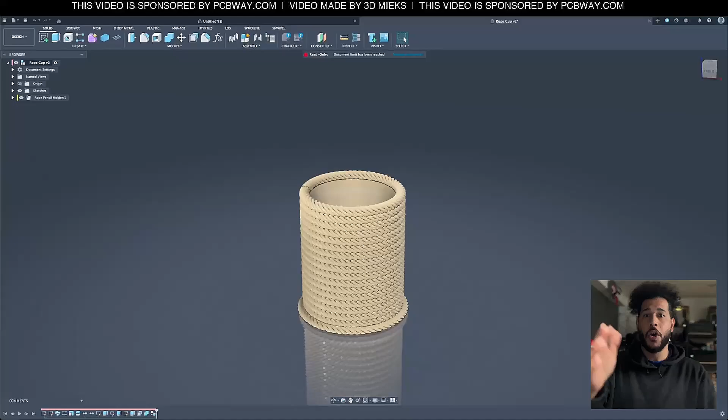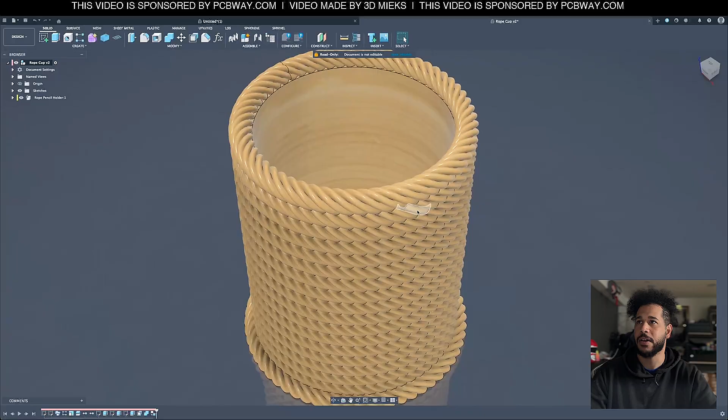It's actually pretty easy to do. A few steps might look super difficult, but this process is actually really easy. It might confuse you how to do it, but it's really simple—a few easy steps. In this tutorial, I will be making it parametric-ish, so make life easier at the end. But yeah, let's get started.

First things first, you're gonna need to start a new document. First thing I like to do is set some parameters. So let's add, first thing is gonna be the diameter. I'm gonna just go like that, and then that's the diameter of the cup. So I'm gonna go 100, and then millimeters, I'm in millimeters.

And then the other thing I like to do is the layers, so the amount of layers of the cup. So if you want it to be a certain amount of layers, we don't have to go in and change it every single time in this thing right here, whatever this thing is, linear or whatever. But this one does not need units. So we're gonna start with, let's say 20.

And then the other thing is we're gonna do a twist, so we're gonna need a little bit of I like to do revolutions and then twists. So first things first, we're gonna do revolutions, I call it revs. Also no units, and then we're gonna go 20 for now. And then this will control the amount of twist on the cup, on the rope, I mean.

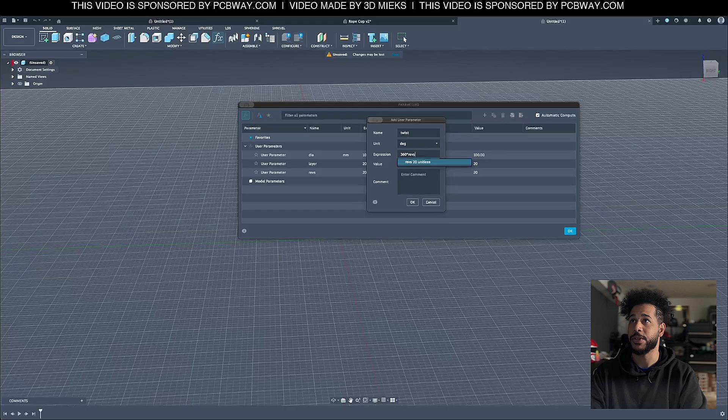So then the other thing is the degrees. We're gonna call this one the twist, and this one is 360 degrees. This is important because the twist, since it's a full circle, needs to be 360 degrees times the amount of revolutions, which we got 20 for now. So instead of going in and changing them every single time, that's what I like to do. And that's it for now.

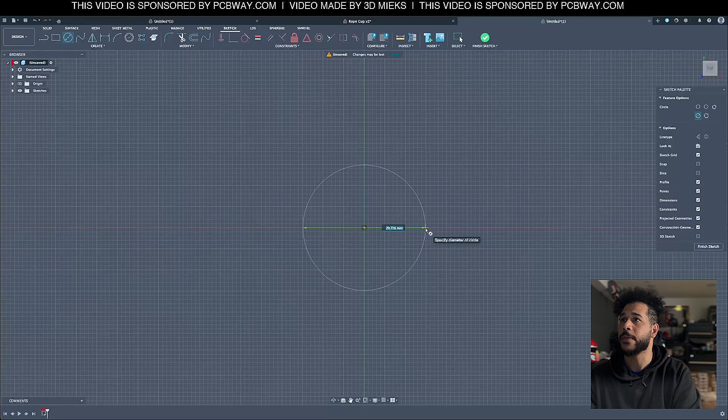Okay, first we wanna start a sketch on the ground plane. And we're gonna make a circle, starting it from the middle, and we're gonna dimension it to the diameter. So there we go, and that's all we're gonna do.

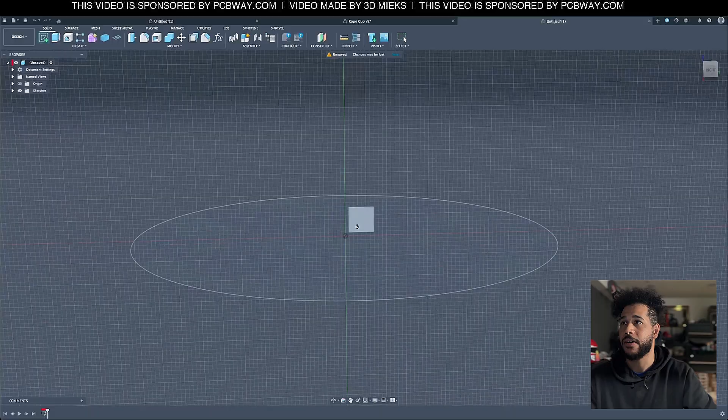Now we got our profile, and now we need to make the rope itself. So what we want to do is start another sketch on the upward plane. We want it to start right here and go around, but the pattern we're gonna do is project, intersect, and then we want to go right here, and make sure the projection link is on, and hit OK.

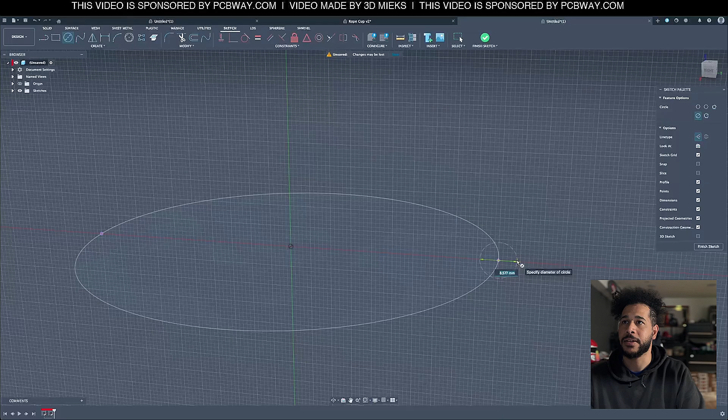So now this is the rope we're gonna do. Now what I like to do is make a circle, but then we're gonna hit X to make it construction. This will be the general thickness of the whole rope. So we keep it in. I like to do like 8. All right, so now we're gonna do 8.

And then we're gonna do another circle, and this time we have to disable the construction. And then we're gonna do a 2-point, because this one will start, drag that up from here, all the way down to here. And that's what I like to do.

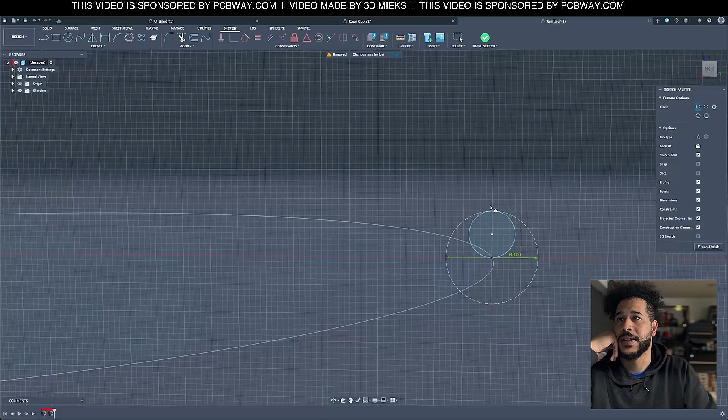After that, we're gonna go into make a circular pattern. We're gonna circular pattern this circle along this. So we got 3, but I like to use 5. Gives it the coarse enough look. If you want the rope to be smoother, you could do more. If you want it to be rougher, you could do less. But I like to go with 5, and hit OK.

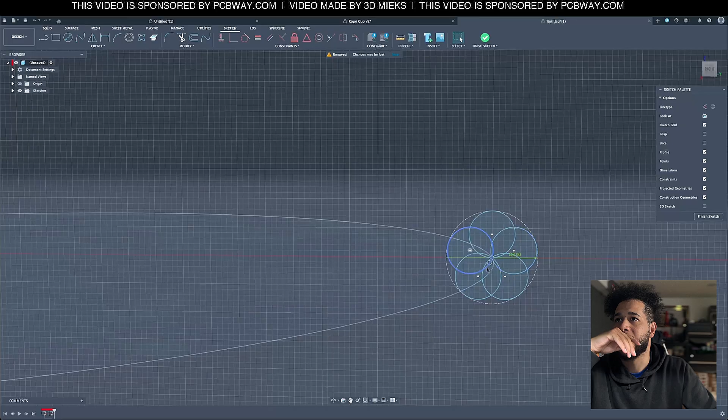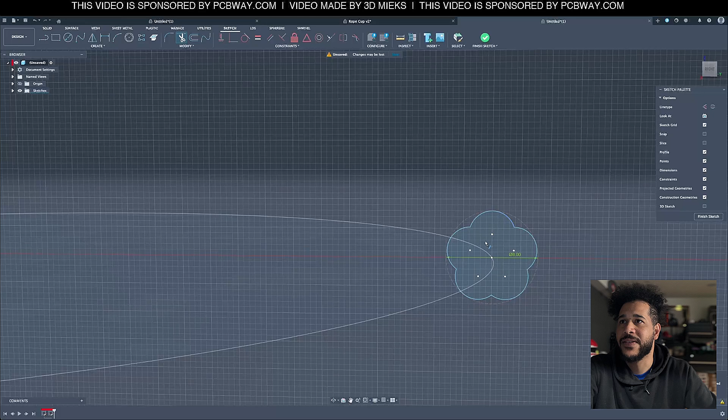And now we got this kind of shape, right? So what we want to do now is I like to trim it, so you could keep it the way it is, but then it's more profiles for the computer to calculate, so we're just gonna trim it. We hit trim, hit here, get rid of all the inside parts right here. And now we have kind of this clover looking thing. And then from here, we just finish sketch.

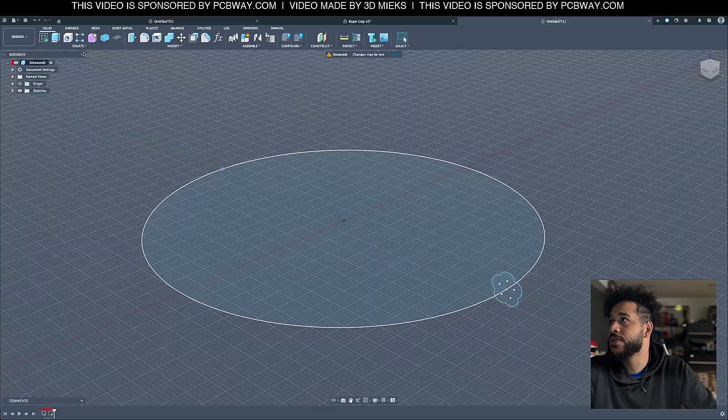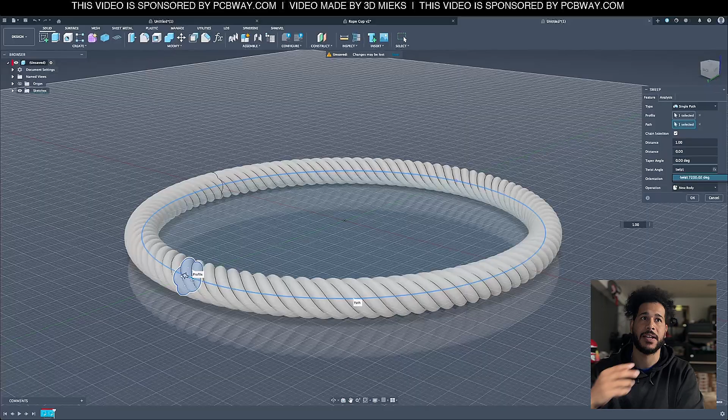And this is where the fun begins. So what you want to do is go into create and then hit sweep. We're going to sweep this profile along this path. When we first start here, it is just a basic thing, but now we're going to go to twist angle, and change this to twist. We already have it set up for 7200 degrees, so you see it previews and makes a rope. So there we have it—we have a rope looking body.

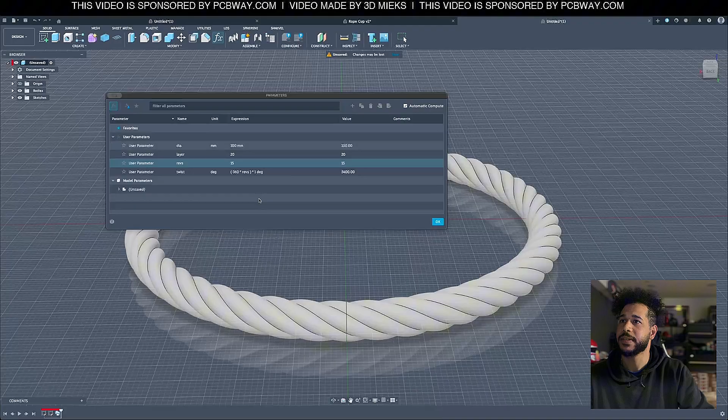So this is why I use parametric settings. We could go open it back up, and then we could change the revolution to say 10, and it'll change the pattern of the rope. But let's go 15, give it a little bit more twist, and then hit OK. Now we got a single ring.

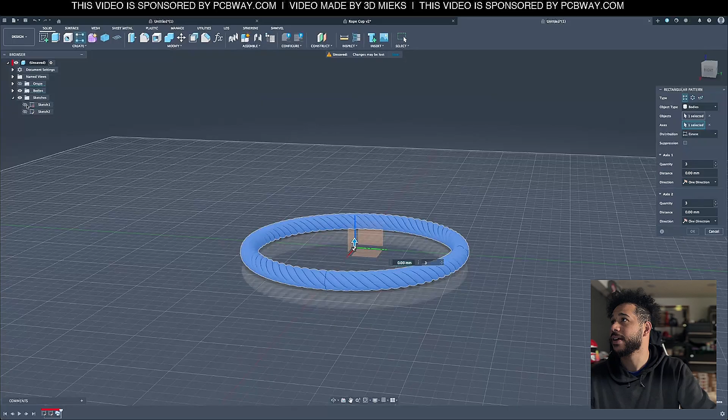Now the next thing we want to do is create this pattern vertically to make like a cup shape. So first we're gonna do rectangular pattern. So we select the body, and then we want obviously the Z-axis, and we made that circle in our sketch right here, 8 millimeters, right?

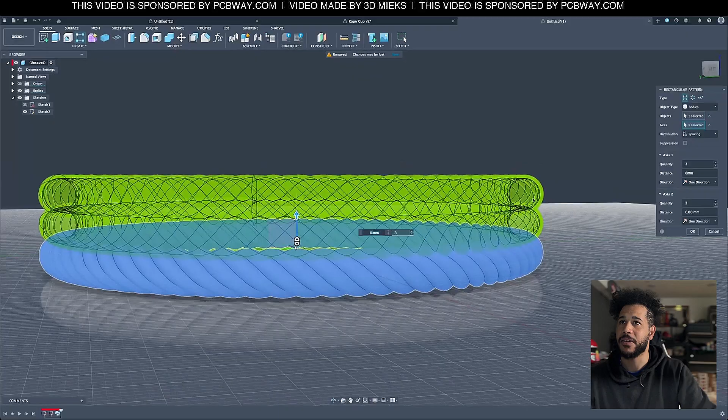So what we're going to do is we want to change the distribution to spacing, and then we want to change it to 8. But if you do 8, it's going to be sitting too much on each other, so I like to drop it down a couple millimeters, so then it makes this nice little overlap, and you'll be able to 3D print it no problem.

And then for quantity, we're going to change this to layers. And then as you see here, we got 20 layers creating this cup looking style.

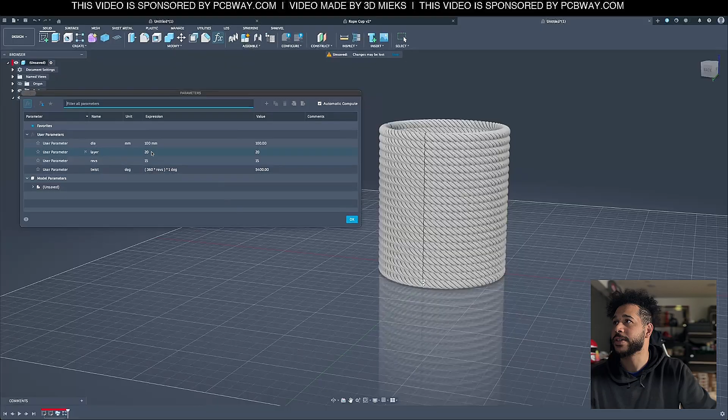And then again, if you want to go and change, if you want it only half, for example, we go 10, and it makes it a little smaller into like a smaller holder. Anyways, so you make this to the height you want. So we're going to change this back to 20 because I like that, because 20 times 6 is 120 millimeters, and that's the average height of a cup I like to do.

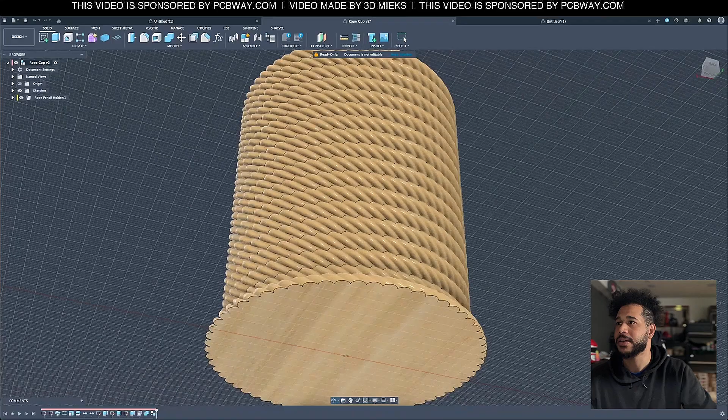All right, we have this. So all we need to do now is make a base for it, and I like to, like the other one, I had the base closed like that, but then the rope texture right here is slightly bigger. So what we're gonna do is...

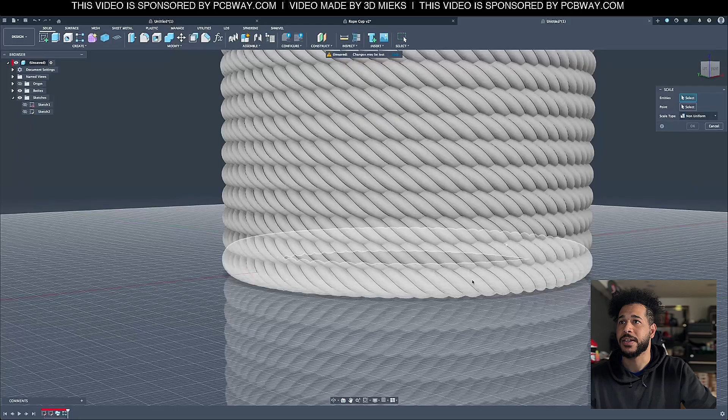Scale. I'll just nice and easy scale this bottom one. So if you hit the letter S and then search scale and hit enter, you select this body, and then we're gonna make sure it's uniform, and the point will be, you have to turn on your origin, and the point is right here, and then make it like 1.05. It's like trial and error, so maybe we could go 1.1 because we don't want it too big. Yeah, that's too big, so we'll go 1.07.

And I kind of like it there. No, a little bit smaller. 1.06 - that gives it a little bit of a higher base, and we'll call that good.

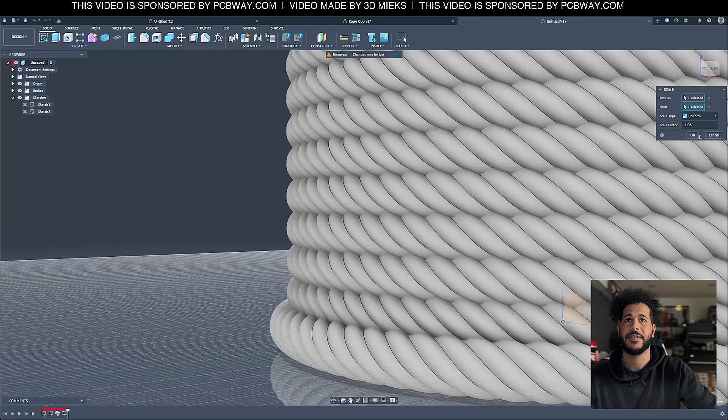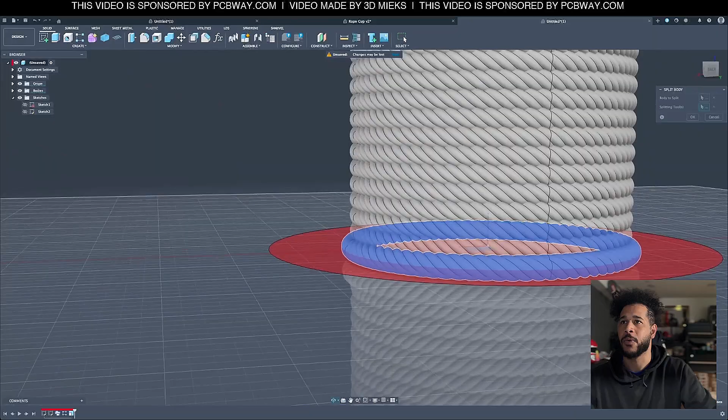So now we have another issue, we need to close it up on the bottom, and we can't let it sit on there. So first thing we're gonna do is we're gonna do split body, just like the base size thingy, the base rope, and then the splitting tool will be the ground plane, and then hit OK.

Now it splits that, and then we can just remove this. So Shift R, we select the bottom part and remove it. Now we have a nice little base.

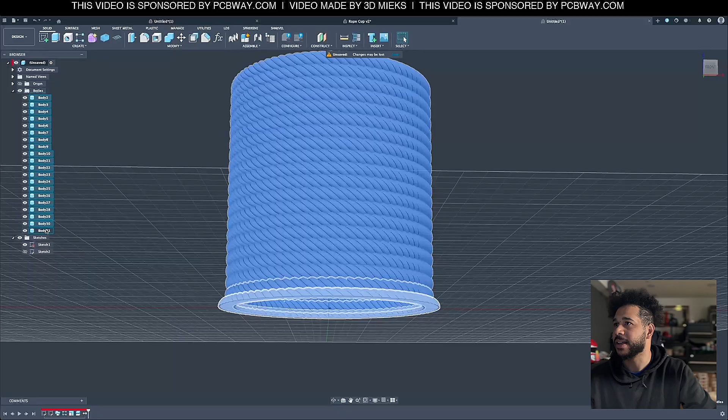What we're gonna do is we're gonna just turn off all these bodies by selecting them all and hitting V, turns it off. And then we'll go here, hit E for extrude, and then we're gonna make this 4 millimeters.

All right, and now we're gonna take all these bodies and then open them up again. And then you can see from the inside, everything is all closed off.

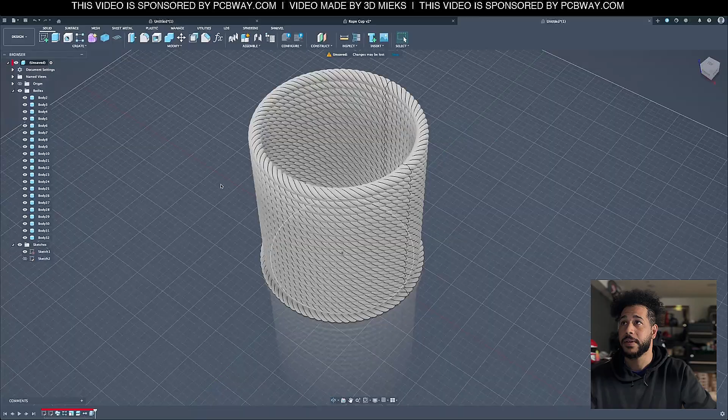Last thing we have to do now is to combine them. So it's very simple, we'll turn off the sketch, close it up, clean everything up, and we'll just go select all like this and then go into combine. This might take a second.

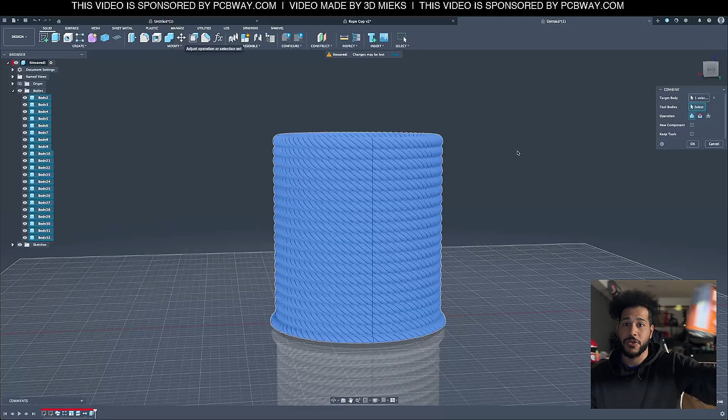All right, and now this might take a minute. So this is where you go and have a sip and enjoy, take a break.

All right, we are done. We got this all in one piece, and this is ready to 3D print. Just like that, we got ourselves a rope-like cup. It's all one piece. You can 3D print it without supports.

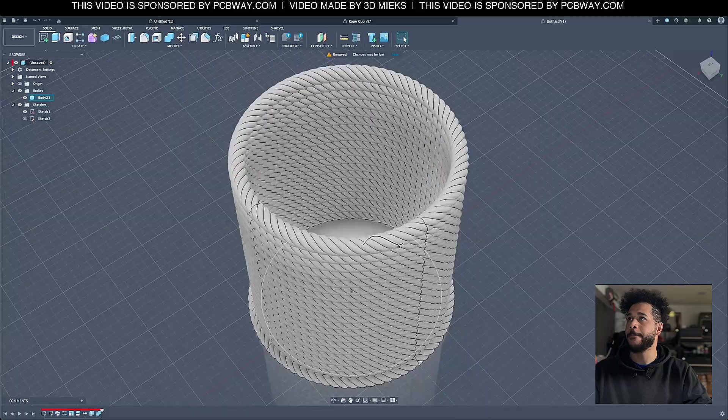Last thing we could do is change the visibility to shaded so it looks nicer, and then turn this grid off. Now we got a nice little look to it.

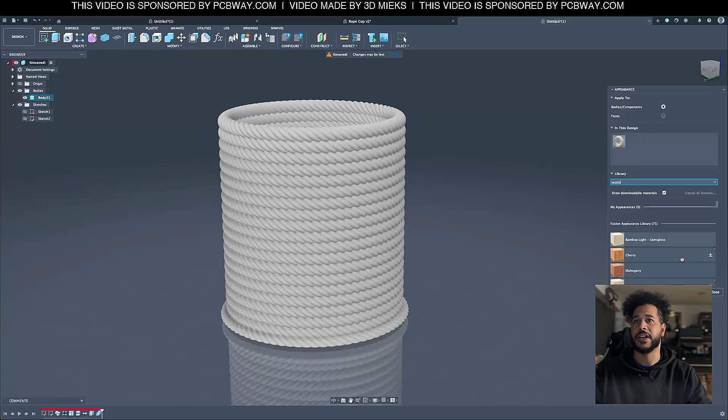What we can do is add some texture to it. I'm gonna just quickly do wood material. I will just go mahogany, for example, and drag that on there. Now we got our rope-like looking cup.

Pretty simple, you could use the rope methods on different ways. Doesn't necessarily need to be a circle. But yeah, here we have it.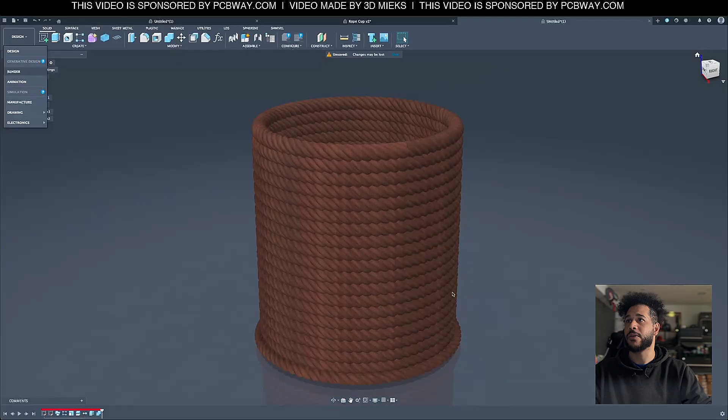I'll do a quick render to see how it looks. Let's go darker. Oh no, too dark. Go right here, lighten it up a little bit. There we go.

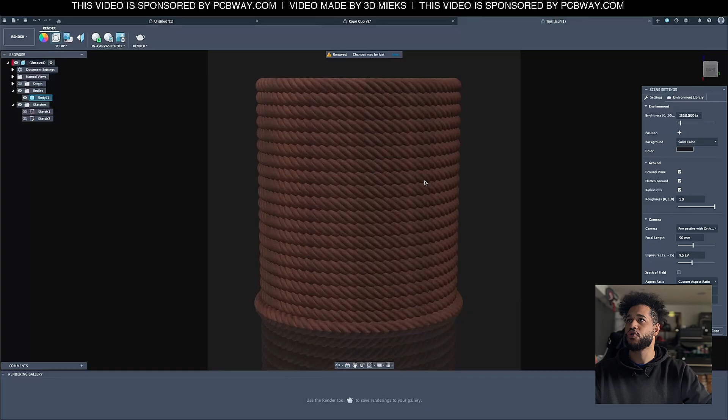Once you render it out, let's see how it turns out. Let's go quickly here. You get the point, it looks pretty good.

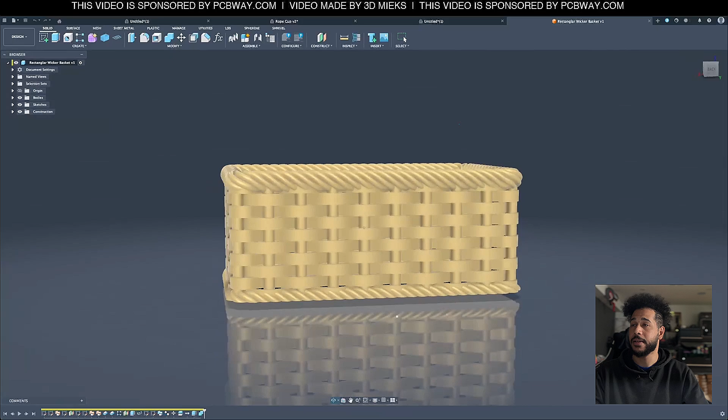Hopefully this helps you out with whatever you need. In the next video, I will try to do a more complicated design like this wicker basket. We'll start with the oval circle shaped one, and it's a little bit easier. Again, we'll do the wicker design and add a little rope to it. And yeah, stay tuned.